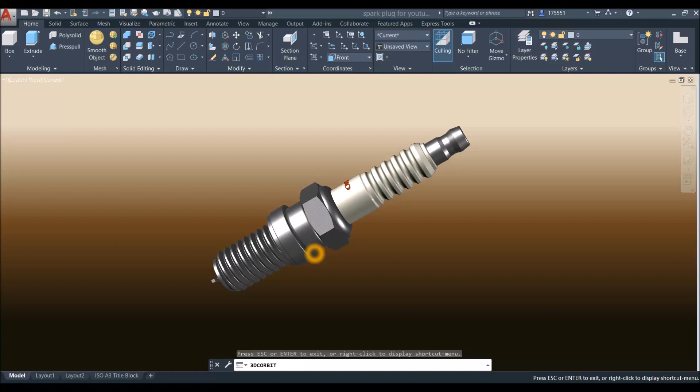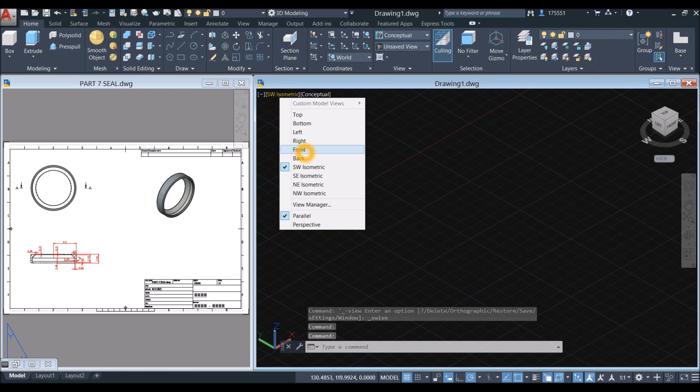I'm gonna create two more simple parts before assembling the rest of the components of the spark plug. So bring your drawing to front view. So click here, select front, and make sure to work on parallel projection by clicking this drop down arrow and select parallel.

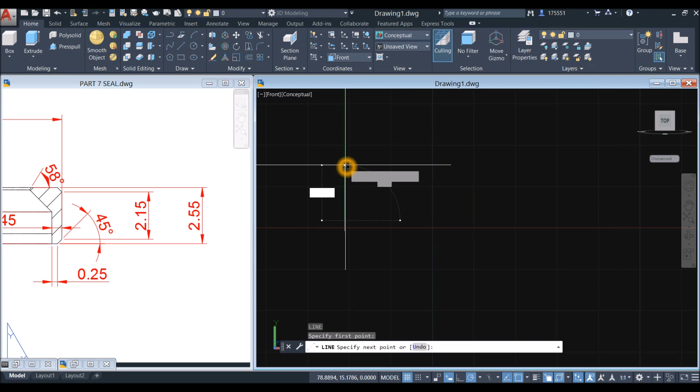Now I'm gonna draw a line from this point here to this point for 2.55. So L for line. Click anywhere on the screen and enter 2.55. And just click zoom extents. I'm gonna draw a line from here to here, which is 0.25. So L for line. Click the end point. Travel to the right for 0.25 millimeters.

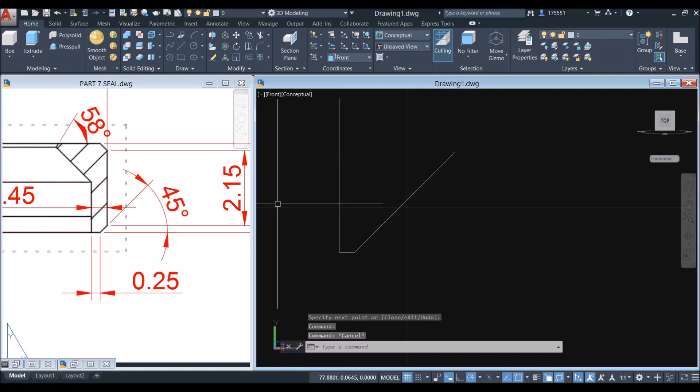And then bring your cursor above the positive x-axis. So just bring it up and press the tab key and enter 45 degrees. Enter. Now I'm gonna offset this one, and as you can see here, the distance from this point to this point is 0.45. So O for offset and enter 0.45. So I'm gonna click this line, click beside it. Now trim, so TR for trim command, enter twice, click this one and click this one.

Now I'm gonna mirror this line, so MI for mirror, click this line, enter, specify first point of mirror line, click from the midpoint here and travel to the right. As long as it's straight, click and select no. Now I'm gonna draw a line, so L for line, from this point to this point.

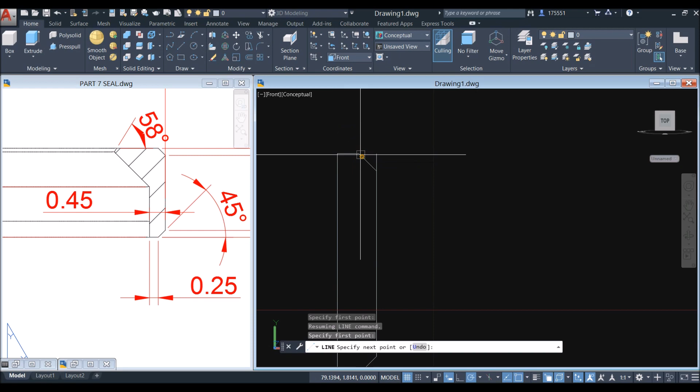I'm gonna draw a line which is half of this object because this is gonna be my axis of revolution from the center. So I'm gonna draw a line for 6.5, so line from this point and move your cursor to the left for 6.5. I'm gonna trim this one, so TR for trim command, enter twice, remove this line and this line.

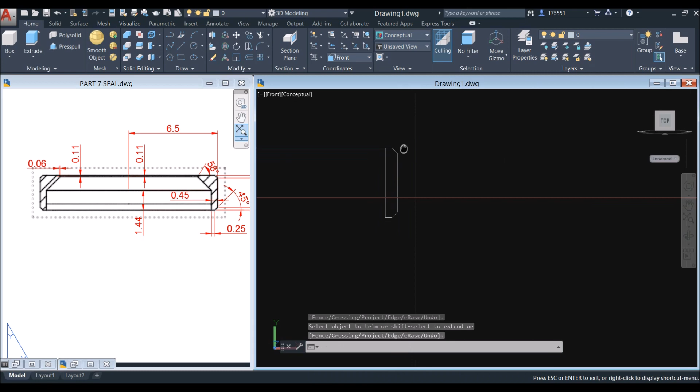Now I'm gonna draw a line from, I'm just gonna move this one. All right, from here, actually from here to here, and I'm gonna start from this point, which is 1.44 from the end point here. So L for line, right click to enter, and shift right click and select from, click this end point, travel your cursor upward for 1.44. Now our line is gonna start from that point.

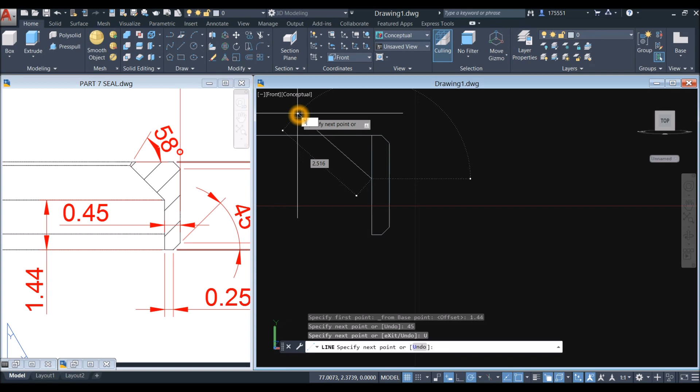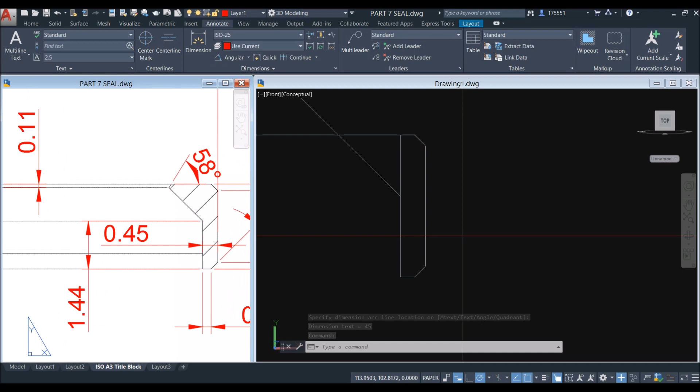Move your cursor from the x-axis of the second quadrant and move it slightly up and press the tab key and enter 135. Let me check again if this is 45. Yeah, it's 45 degrees. All right. Now I'm gonna offset this line here for 0.11. So O for offset, enter 0.11, click this line and click below that line and trim, so TR for trim command, enter twice, remove that and remove this one.

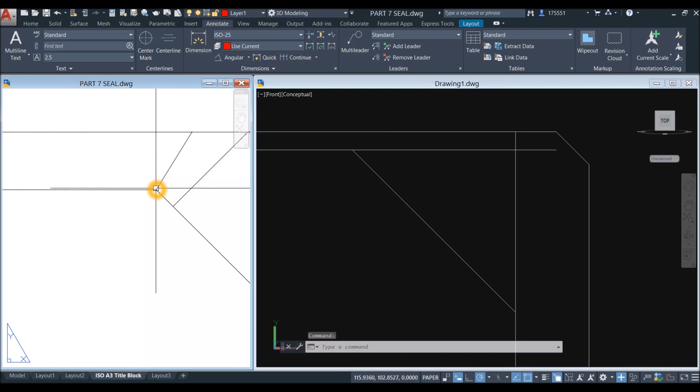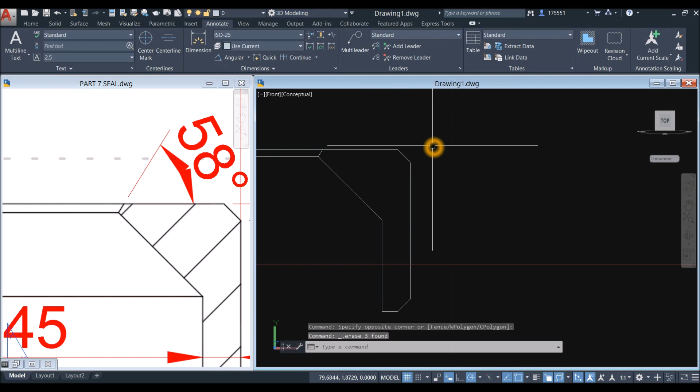Now I'm gonna start a line from this point and the angle is 58 degrees, so L for line, click that end point, move your cursor above the x-axis of the first quadrant and press the tab key and enter 58 degrees. Type TR for trim command, enter twice, remove this one, remove this line, remove this line, remove those. Let me check. And you can remove this line here.

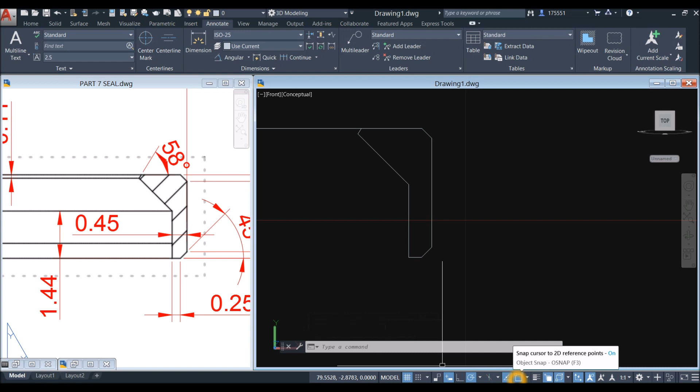Now I'm gonna join the segments by typing J for join command, right click, and window the whole thing. And we need another line here, L for line, endpoint to endpoint. So J again for join command, right click to enter, click this one and click this line here. And before we proceed, go down to the status bar and make sure your dynamic input is on, polar tracking, object snap tracking, object snap, selection cycling, and 3D object snap.

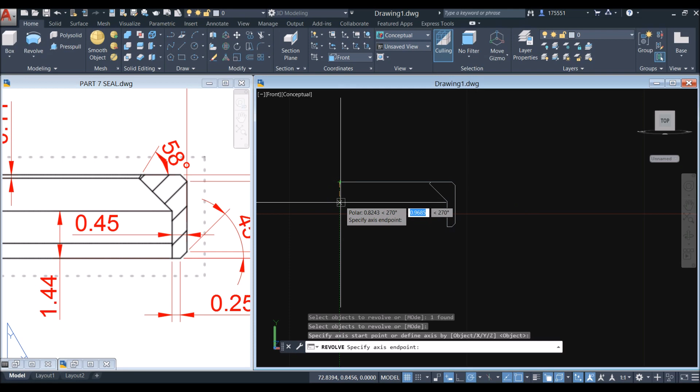Now I'm gonna revolve this one. So type in REV, or you can go to home, click this drop down arrow and select revolve. Click the object you want to revolve, right click, enter, and specify axis start point. Click this one, click below or up as long as it's straight, enter, and specify angle of revolution. You can enter 0 or 360 degrees. So I'm just gonna enter 0 and we're done.

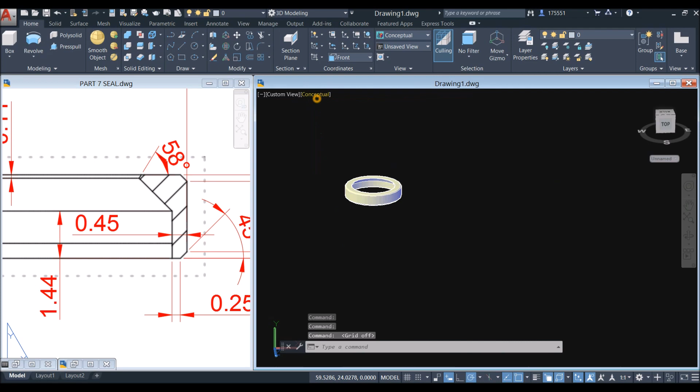I'm gonna show you, I'm just gonna turn off the grid. I'm gonna change this to X-ray and bring this to front view and compare this one here.

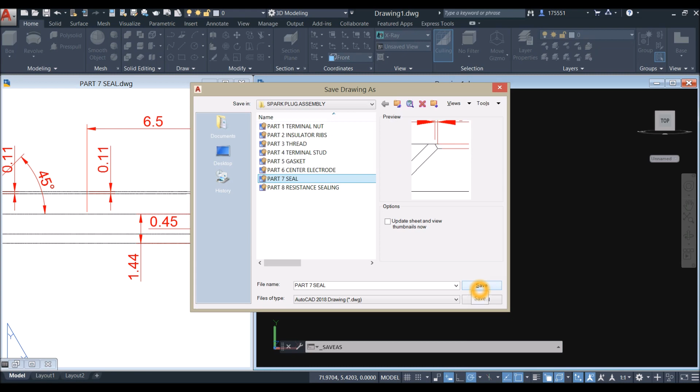Alright, so I'm gonna save this drawing. So save as. I already created this one. I'm just gonna replace it with part 7 seal. So this is the folder I created for the assembly. You can create it wherever you want to put it. So part 7 seal, save. I'm just gonna replace it. Yes.

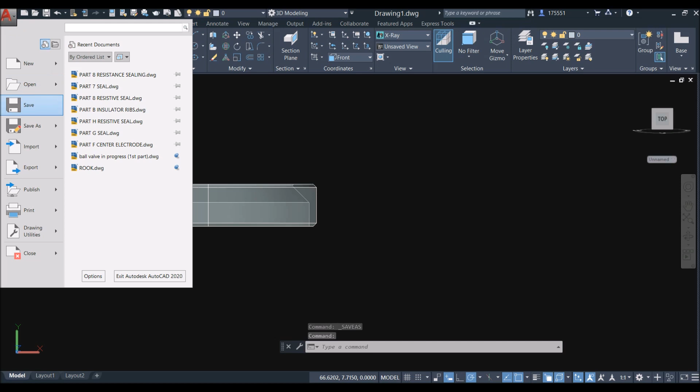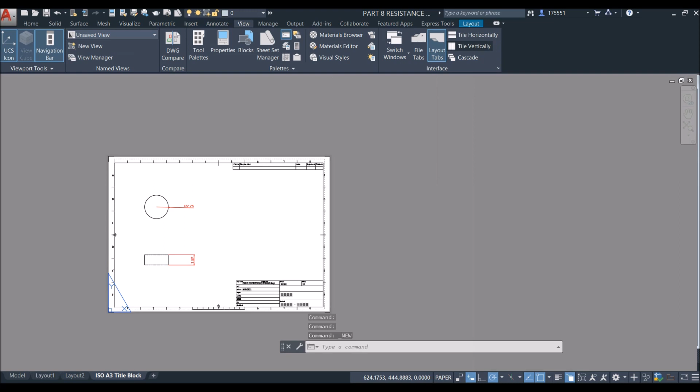Okay, I cannot do that because this one is open, so I'm gonna close this one first. Yes. Save this one, save as. Part 7 seal, save. Yes. Alright, now I can close this one. And for this one, I'm gonna create another drawing, so new. Acadiso 3D for metric units, open. I'm just gonna open 2 files.

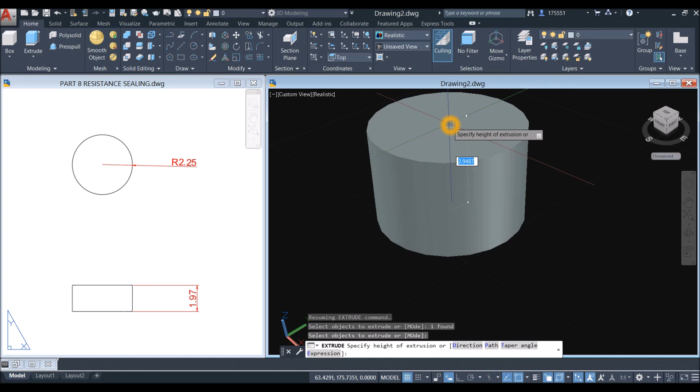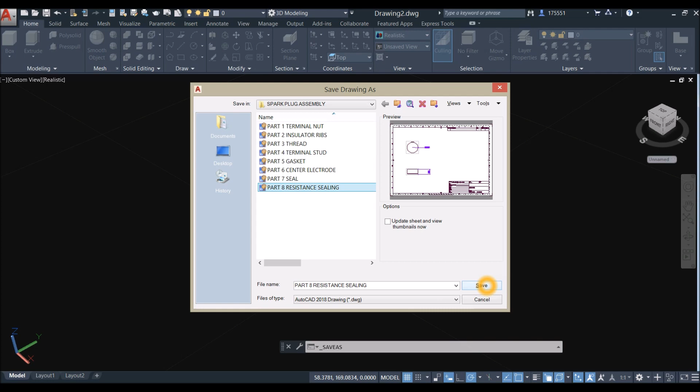This is the simplest of all. So bring your drawing to top view, create circle, so C for circle, click anywhere on the screen and insert 2.25, zoom in, and then go to the ribbon, click this drop down arrow and select extrude, click the object you want to extrude, enter, and bring it up for 1.97, and you're done. So I'm just gonna save this as part 8 resistance sealing.

So I'm just gonna close this one. No. Save as. I'm gonna save it in the same folder. So just gonna replace this one. Save. Yes. Now I can close this one. So all the parts are complete.